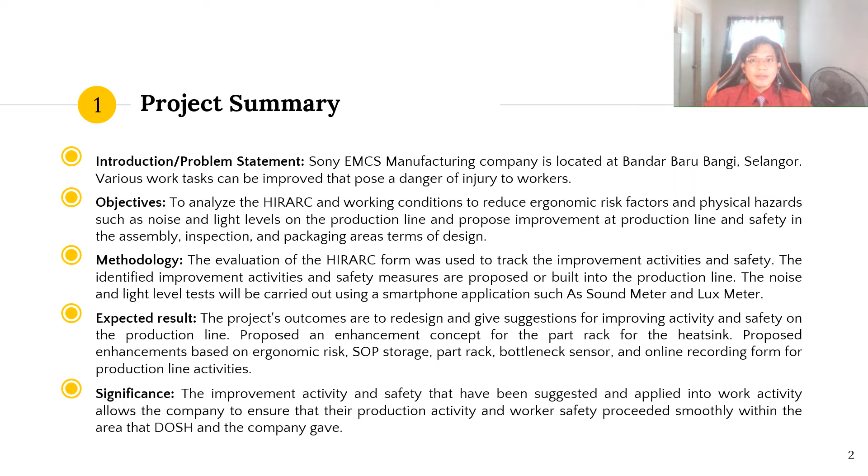Firstly, for the introduction part, this project will be conducted at Sony EMCS Malaysia Sdn Bhd, a Japanese company with an office in Bandar Baru Bangi located in Selangor. Sony's primary market is most of the population, with items such as mobile phones, video game consoles such as PS2, PS3, PS4, and televisions, Blu-ray players, and also cameras aimed at consumers. These products mainly target high net worth individuals, families, young professionals, and also early adopters.

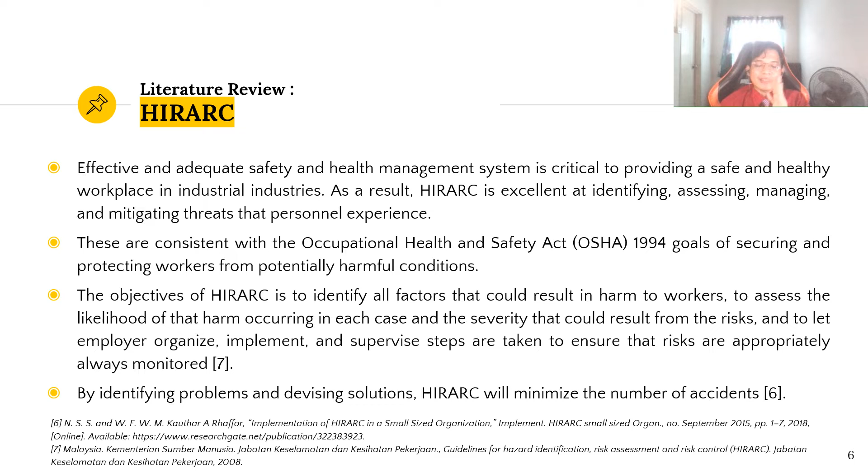The second one is HIRARC, where an effective and adequate safety and health management system is critical by providing a safe and healthy workplace in industries. As a result, HIRARC is excellent at identifying, assessing, managing, and mitigating threats that personnel experience. These are parallel with OSHA 1994 goals of securing and protecting workers from potentially harmful conditions. The objectives of HIRARC are to identify all factors that could result in harm to workers, to assess the likelihood of that harm occurring in each case and the severity that could result from the risk, and to let employer organize, implement, and supervise steps to ensure that risks are always appropriately monitored. By identifying problems and devising solutions, HIRARC will minimize the number of accidents.

The fourth literature review is light level, where the light in the workspace should allow employees to see what they require to perform their jobs comfortably. Additionally, proper lighting produces a lovely ambience and brings good feedback from employees, and this can increase their production and efficiency. But poor lighting affects employees' vision and might result in visual tiredness and discomfort. It can also harm people's health at work, generating symptoms such as eye strain, migraines, and headaches. Apart from that, inadequate lighting at work can impose high costs on business in the form of lost time due to accidents and injuries, increased absenteeism, and decreased work efficiency and production.

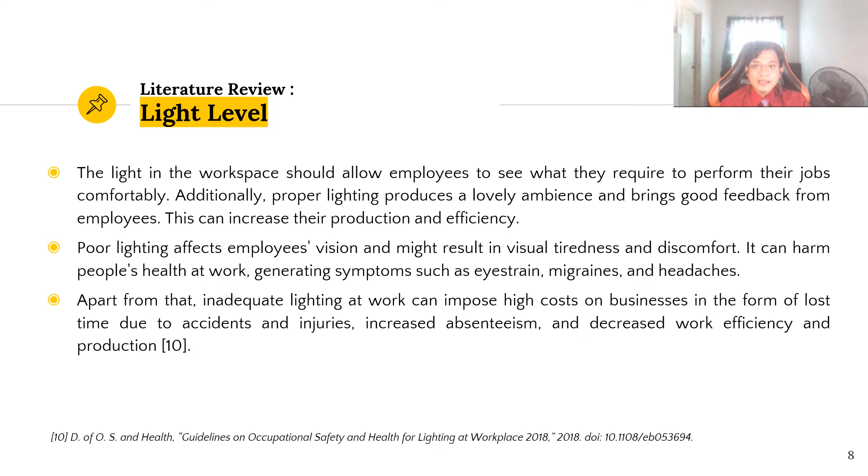And lastly is ergonomics, where ergonomics aims to reduce tiredness and injury while boosting comfort, productivity, job satisfaction, and safety, because work-related injuries are not unavoidable, but a well-designed job should not cause harm. Awkward postures are those that, when repeated or held for an extended period, increase the risk of tiredness, pain, or injury. Low back pain is a persistent condition in the United States of America, affecting between 12% to 30% of the population at any given time. According to OSHA recommendation, an effective control program should include a systematic investigation of the work area to detect, classify, and eliminate ergonomic hazards.

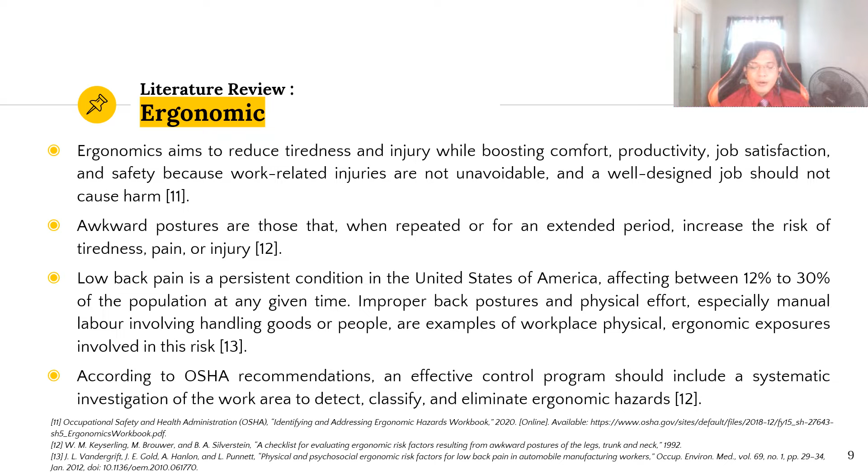Moving to the problem statement, in Sony EMCS there will always be an issue on the production line which will impact production activity and also machine and worker safety. First, the production line is not equipped with a sensor that can determine which station is experiencing a bottleneck. Various work procedures should improve job activity and safety. Third, numerous pieces of work equipment need adequate storage and jigs for usage. Lastly, ergonomic factors including posture, noise, and light level must be analyzed to comply with DOSH requirements.

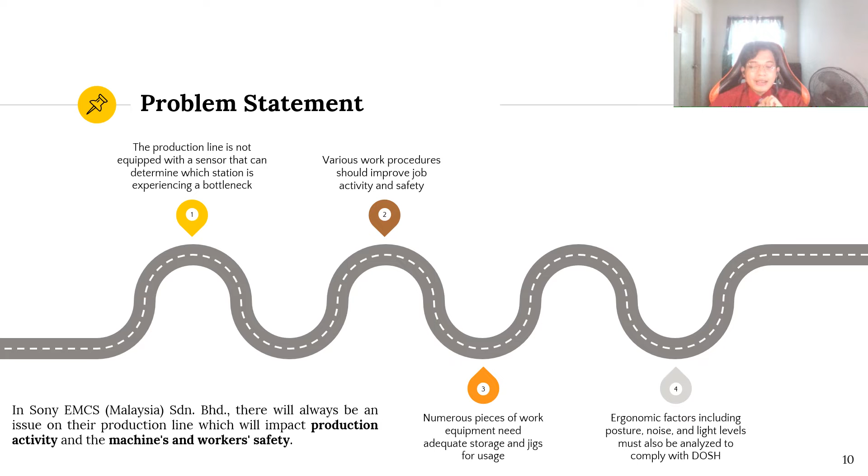The objectives of this project are to analyze the HIRARC on the production line, to analyze the working conditions to reduce ergonomic risk factors and physical hazards such as noise and light levels, and to propose improvements to production line safety in the assembly, inspection, and packaging areas in terms of design.

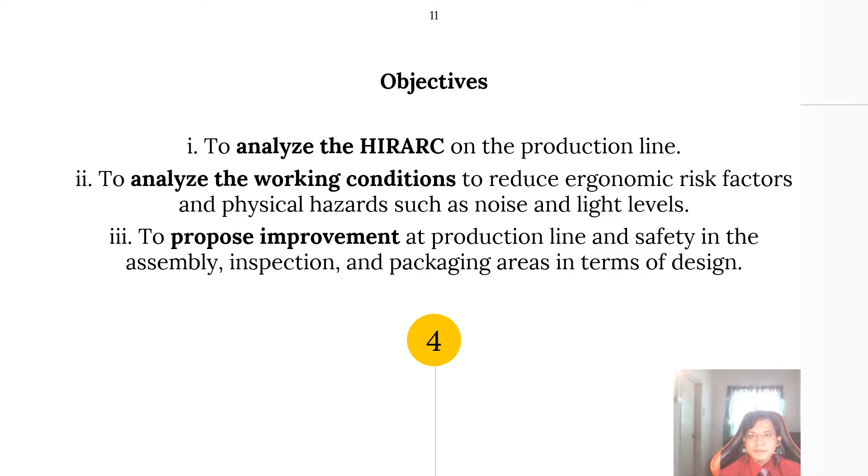For the scope of the project, the first is engineering control, proposing an approach for improving the production lines and ensuring employee safety in the assembly, inspection, and packaging areas. Second is light level, using a digital light level meter to determine the illuminance parameter, which by DOSH will be compared to the standard parameter.

For ergonomics, the working posture was analyzed using the RULA method, and recommendations for improvement were made using sample images and references for poor working posture. Fourth is noise level, where a digital sound level meter is used to determine the noise level, which can be demonstrated visually by noise mapping showing the highest and minimum sound level. This data is also compared to the DOSH-defined standard parameter.

Lastly, risk assessment and control. By using the HIRARC form, we can establish the level of risk at work and recommend solutions for each hazard encountered.

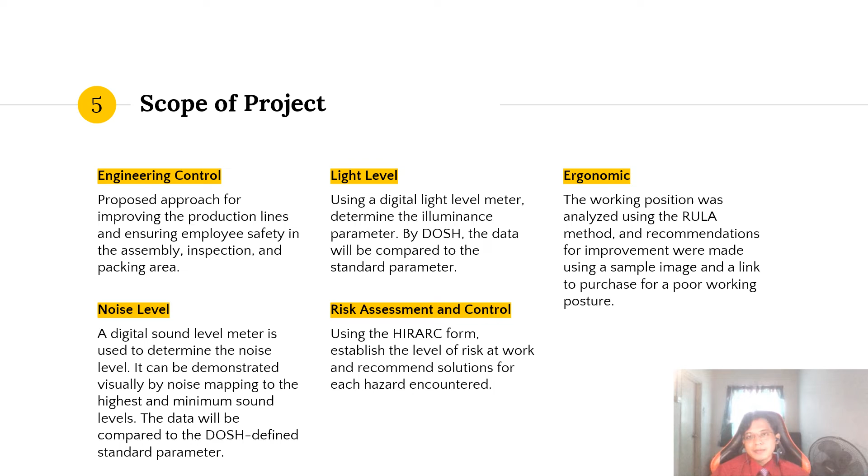For the project methodology, starting with determining the title for the final project, followed by analyzing work activities, where we conduct a site visit to the selected company and classify the type of production line used, the normal activities of the workforce, and all the machinery, materials, and equipment in the company.

Next is risk identification, split into two parts. The first is safety, using a check sheet for building and machine safety, conducting noise and light level checks, and also ergonomics, and we propose improvements in the production line.

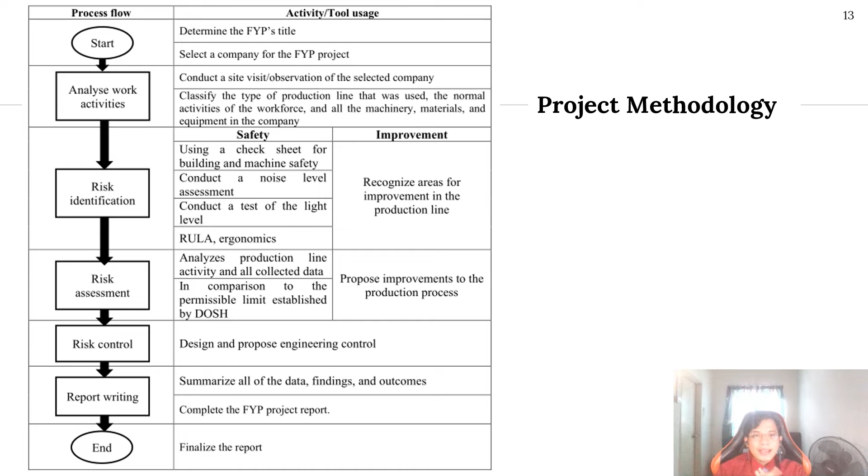Next is risk assessment, where we analyze the production line and all collected data in comparison to the permissible limits established by DOSH, and propose improvements to the production process. Next is risk control, where we design and propose solutions using engineering control. Lastly is report writing, where we summarize all the data, findings, and outcomes to complete the FYP project report.

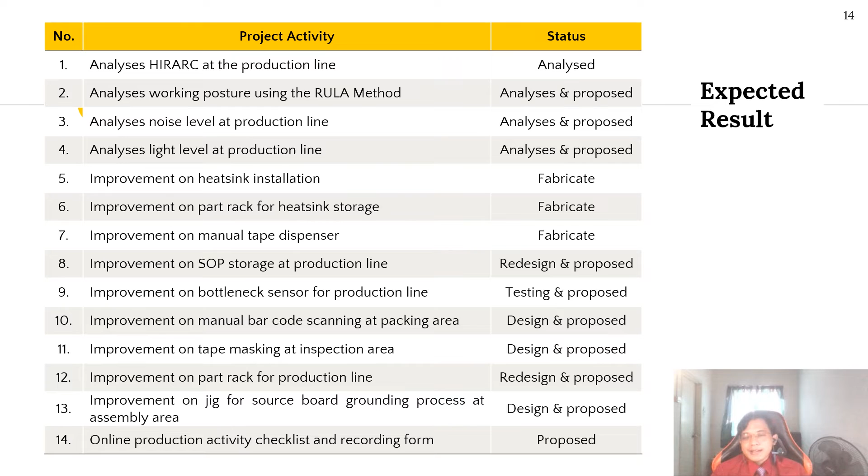This is the expected result for my final year project. The first activity is HIRARC analysis for the production line, where we identify the hazard at the company, evaluate the hazard, and determine how to overcome it. These are the 6 hazards we determined currently at Sony EMCS.

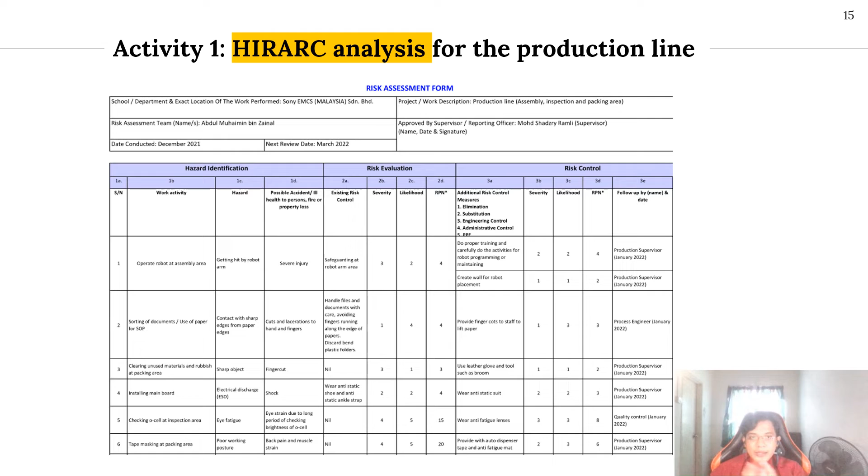The second activity is using the RULA method to improve the working posture. The problem is the working posture can cause back pain and muscle strain, so we propose to place an anti-fatigue mat and have the worker wear a back support belt. The impact is it can help reduce fatigue and also increase productivity.

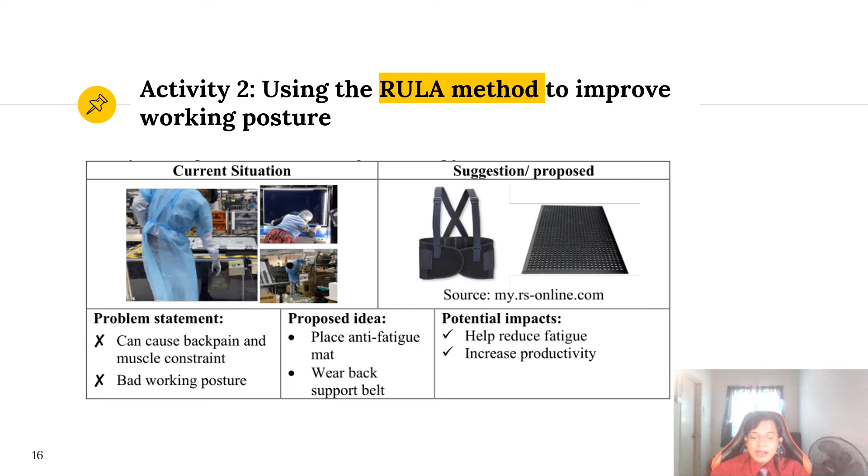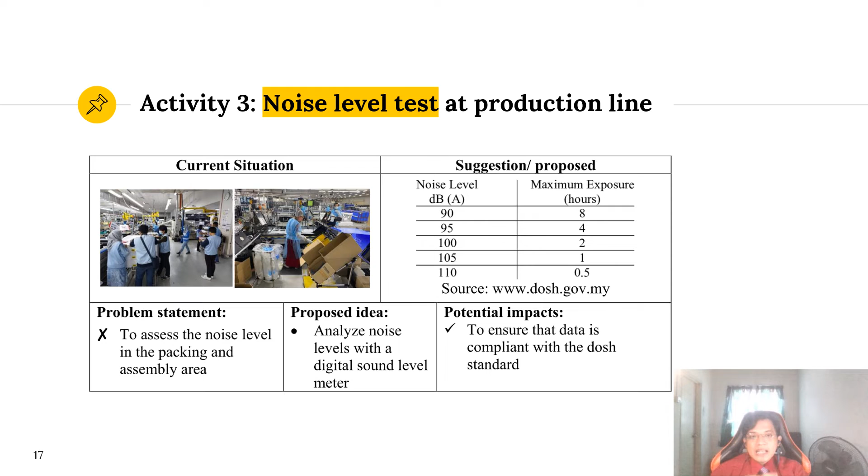For the third activity, noise level testing at the production line, we want to assess the noise level in the packing and assembly area. By analyzing the noise level with a digital sound level meter, we can ensure the data complies with the DOSH standard.

The fourth activity is light level testing at the production line, which is similar to the noise level test, where we want to assess the light level in the packing and assembly area. By analyzing light level with a digital light level meter, we can ensure the data complies with the DOSH standard.

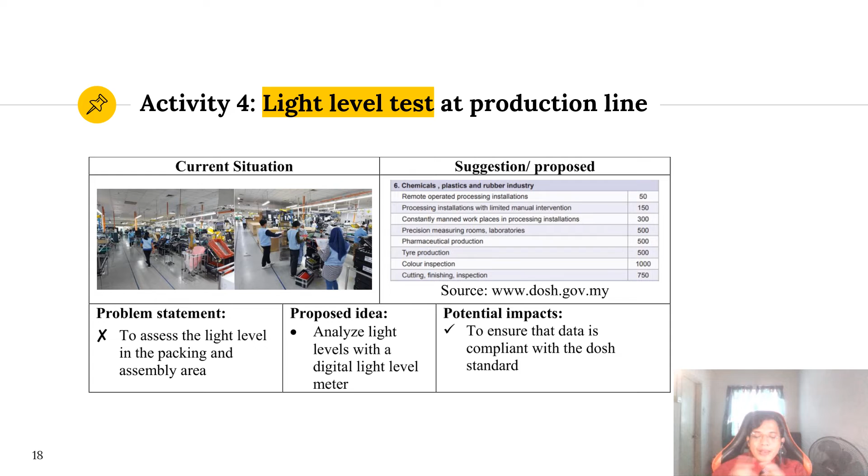The fifth activity is improvement on the heatsink installation, where previously there was no holder to hold the heatsink, making it hard for the worker to remove it from the rack. We propose to install a screw on each corner of the heatsink, which improves the takt time for heatsink removal and allows workers to easily hold the heatsink by holding the screw.

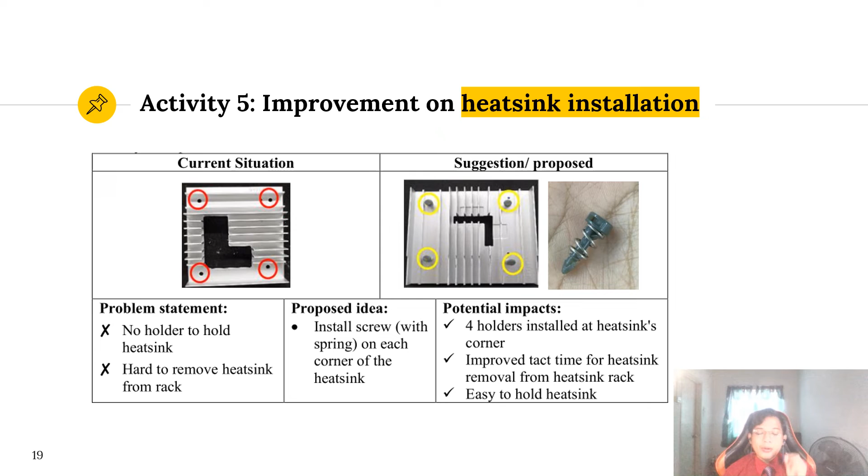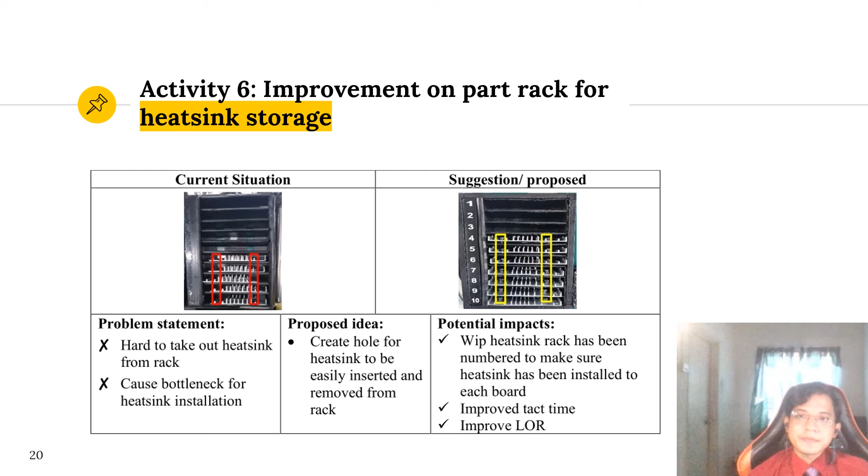The seventh activity is improvement on the manual tape dispenser, where the problem is the manual tape dispenser needs to be adjusted in length manually, and is not consistent for each tape length. The proposed idea is to install an automatic tape dispenser, using the RT7000 automatic tape dispenser, with the impact being easily adjustable tape length and accurate length for each tape.

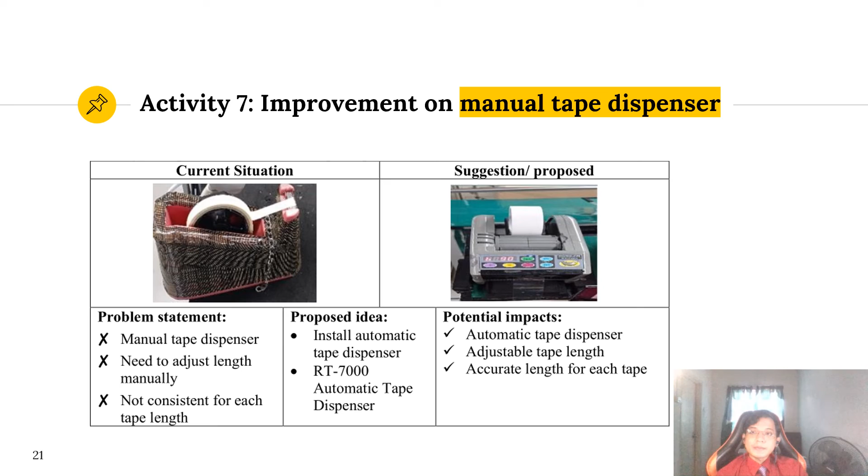The eighth activity is improvement on the SOP storage at the production line, where the current problem is SOP files can fall easily and there is insufficient space for each model for each section. We propose to install round shape SOP storage, which can also be rotated. The impact is the SOP file will not fall and slip, it is easy to move anywhere, and it provides proper SOP storage.

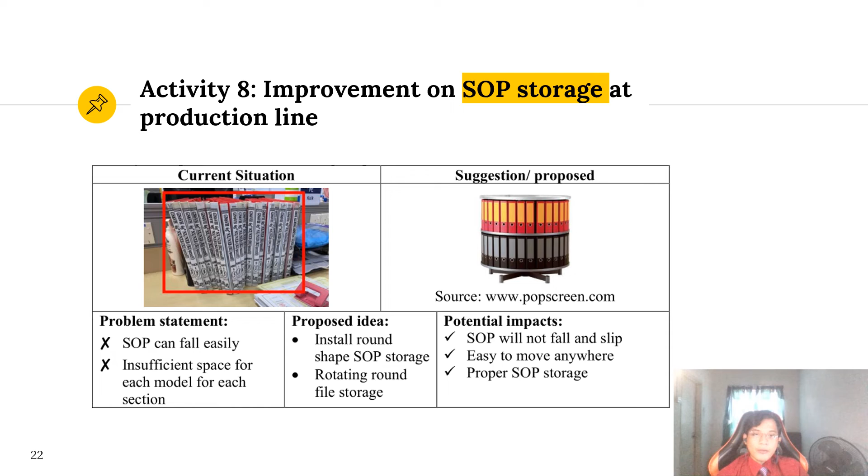The next activity is improvement on the bottleneck sensor at the production line, where the current problem is there is no automatic bottleneck sensor, and the operator or supervisor finds it hard to determine which station caused the bottleneck. We propose to install a programmed red LED warning light at each station so it is easier to determine the bottleneck station.

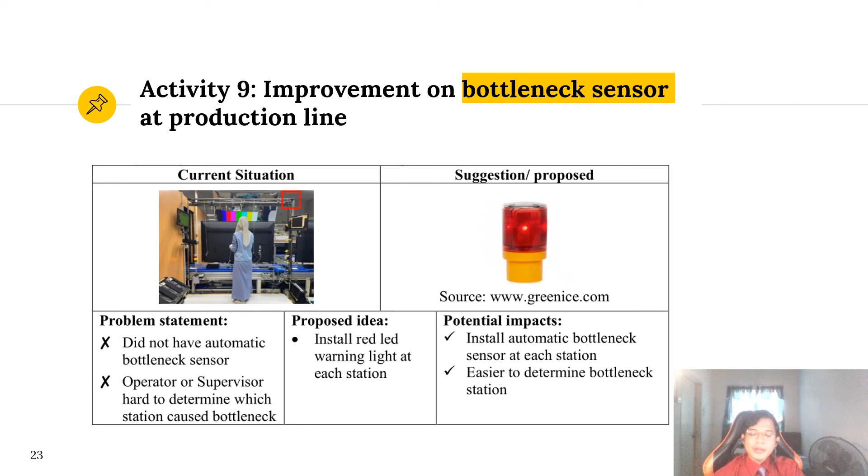The next activity is improvement on the manual barcode scanning at the packing area, where the current problem is the worker finds it hard to scan, which can cause scan error, and can also cause back pain. We propose to install auto scan using RFID system, which can reduce the job element, eliminate back pain or poor working posture for scanning, and improve takt time.

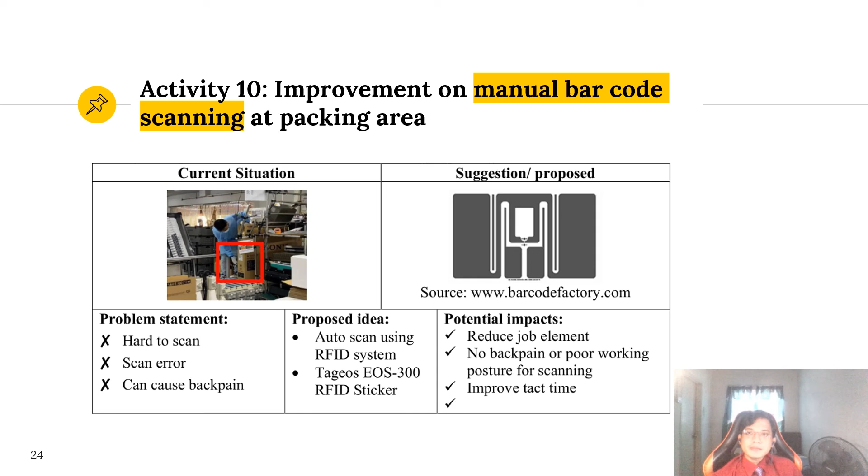Activity 11 is the improvement on tape masking at the inspection area, where the problem is it is hard to tape at larger TV inches, and it can cause muscle strain and back injuries. We propose to install a hand packaging tape dispenser. The potential impact is one-hand tape masking, reduced back pain, reduced job element, and reduced takt time for tape masking.

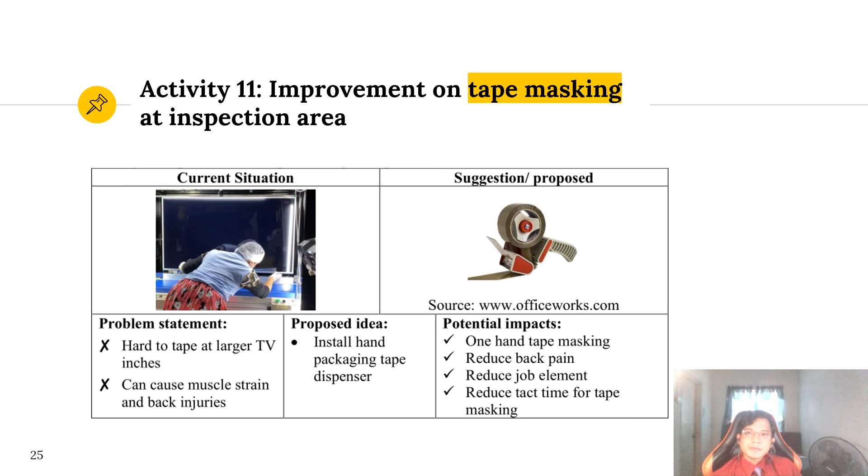The next activity is improvement on the part rack for the production line, where the current problem is it is a fixed part rack, so we cannot adjust for different height or space, and it is hard to move. We propose to install a roller and adjustable part rack with different height, so we can adjust for the height needed and carry it to another place or station at the production line.

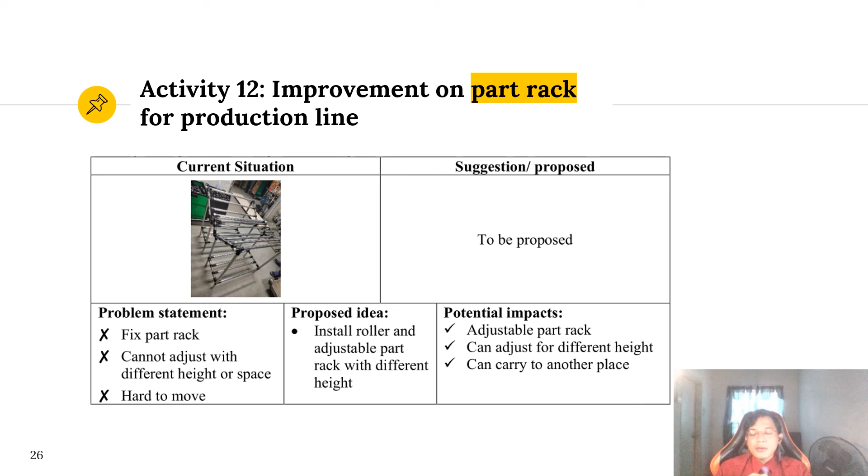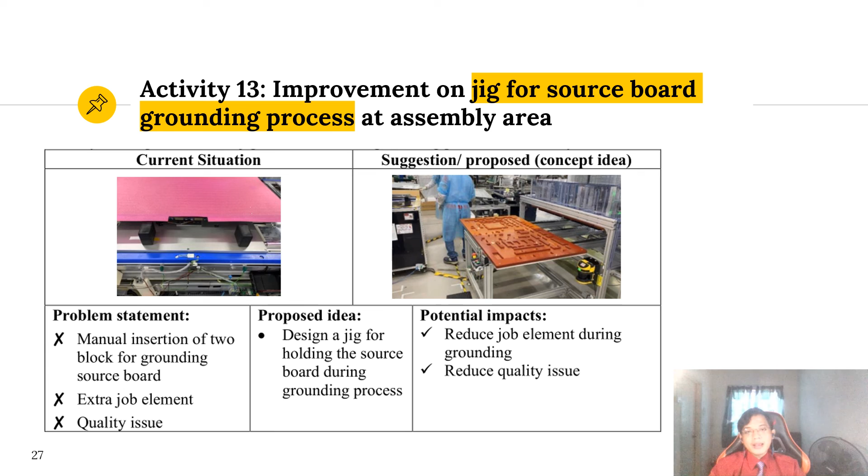The next activity is improvement on the jig for source board grounding process at the assembly area, where the current problem is workers need to manually insert two blocks for grounding the source board, which is extra job for the worker and can cause quality issues. By designing a jig for holding the source board during the grounding process, we can reduce the job element during the grounding process and also reduce the quality issue.

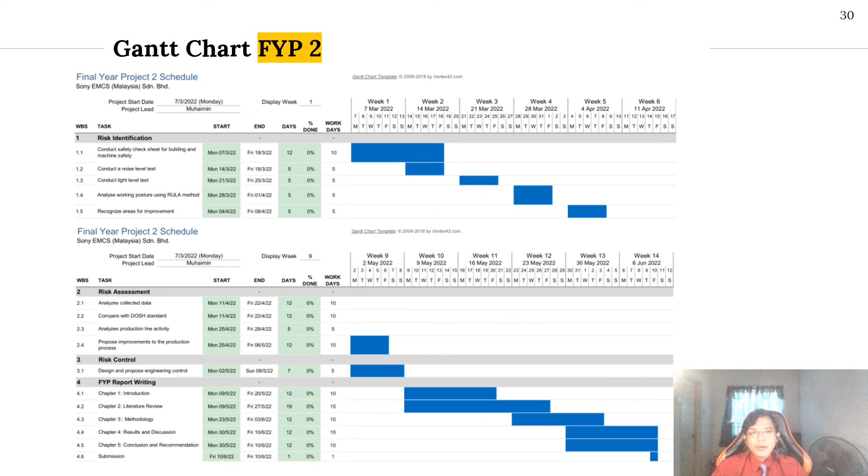I think that is all for my final year project proposal presentation.